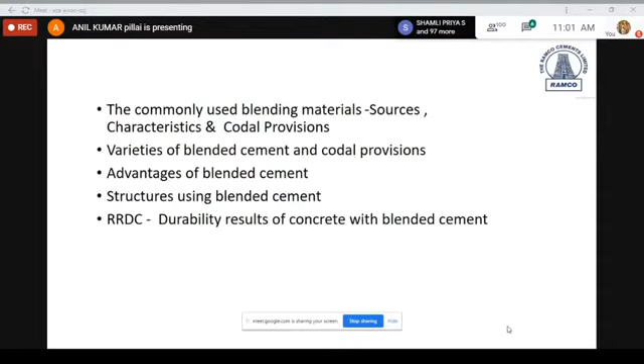I would be sharing those results so that you would be convinced as to what is the technical and qualitative reasons for using either blended cement or blending materials in concrete.

And blended cements from the Ramco Cements Limited. In fact, we not only manufacture one type of blended cement, there are varieties of blended cements that we manufacture. So a brief overview of that and how the type of cement must be selected. This is very critical because as civil engineers, you would be confronted with various types of cement, various brands of cement, and what are the considerations you must give before selecting the type of cement. That is very important. It is not just that you go in for selecting PPC, PSC, or ordinary Portland cement.

So these are some of the points that I would be covering in today's presentation. I hope this would be of interest to all of you because as civil engineers, you must know the properties of materials that is going to go in for concrete.

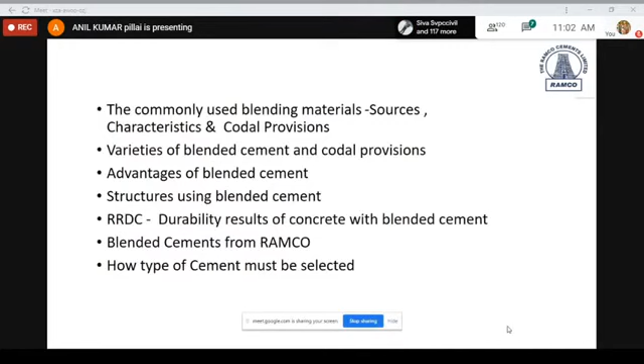The first and foremost thing, let me go to the history of Roman seawater concrete itself, which would throw more light on why it is relevant. If you look at this, the chemical secrets of concrete Roman seawater that has spent the last 2000 years submerged in the Mediterranean Sea have been uncovered by an international team of researchers led by Paulo Monteiro of the US Department of Energy. What they have found is that the Romans made concrete by mixing lime and volcanic rock.

The lime and the volcanic ash were mixed to form mortar, and this mortar and volcanic tuff were packed in wooden forms. The seawater instantly triggered a hot chemical reaction. The lime was hydrated, incorporating water molecules into its structure, and reacted with the ash to form a whole cement matrix. This is how the research led into the history of how volcanic ash enabled them to make a mortar or concrete which has seen the ravages of time.

So what I just wanted to tell you through this slide is that blended cements are not a novelty. It has been there for ages, right from the time when the Romans invented concrete. So this is nothing new, but many of us do not understand its significance, why it is being used. We only think that it is used from an environmental perspective.

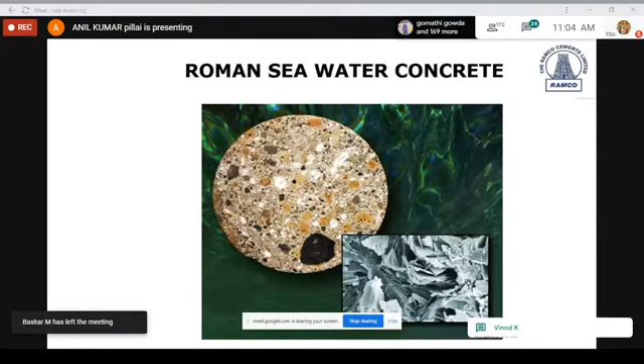Cements containing silica fume are relatively new. Otherwise, pozzolanic cements have a very rich history and are nothing new.

Some of the commonly used blending materials are fly ash, slag, and Portland cement. We proportion fly ash or slag with Portland cement in various proportions to get the desirable concrete. Silica fume, or amorphous silica, is also a blending material, but you don't mix silica fume at site. Silica fume in the non-crystalline or amorphous form is used to blend with Portland cement. So these are some of the materials available. The commonly used blending materials are fly ash, slag, and silica fume.

There are many other blending materials prescribed in the code, but these three are the commonly used ones, either blended with cement at site or used as blended cement. Fly ash has very spherical particles compared to Portland cement and slag, due to which you get good workability. So these are the commonly used blending materials, which you need to keep in mind.

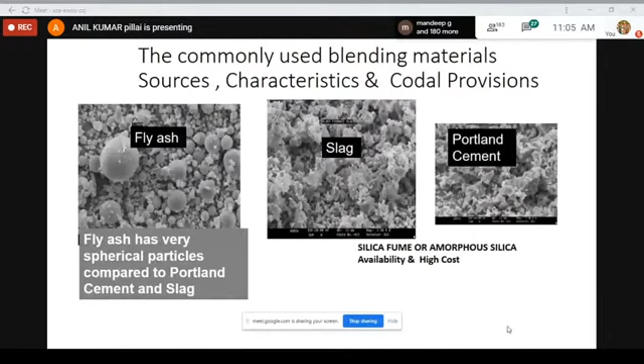Some characteristics of blending materials: these pozzolans are rich in silica and alumina, and they combine with lime. As shown in the first slide, lime was combining with pozzolana to form a cementitious compound. These compounds are very similar to those produced by the Portland cement hydration reaction, and that reaction produces lime, hence Portland cement works well with pozzolans.

The degree of reactivity of various pozzolans with lime is called pozzolanicity. This is very interesting. The definition of pozzolan is a siliceous and aluminous material. By itself, it is inert, but when it combines with lime, it forms a cementitious compound - that is why it is called pozzolana. The degree of pozzolanicity depends on how much calcium hydroxide is consumed. If more calcium hydroxide is consumed, that means the degree of pozzolanicity is very high. So that is what the definition of pozzolanicity is all about.

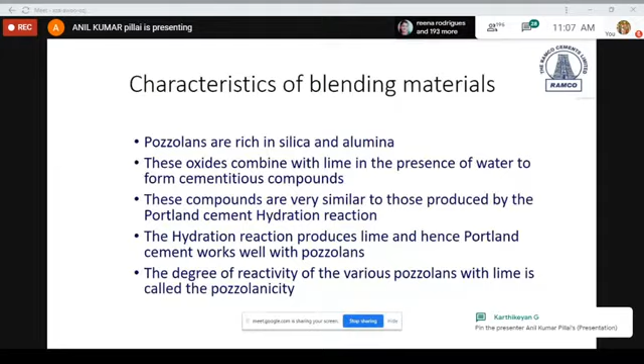This is some basic definition you must know. Some use these terms interchangeably - some call it blending material, some call it supplementary cementitious material. Technically and environmentally it is advantageous, and it can be used in combination with Portland cement. It's available for use in normal concrete, special concrete, and has an excellent and proven performance record.

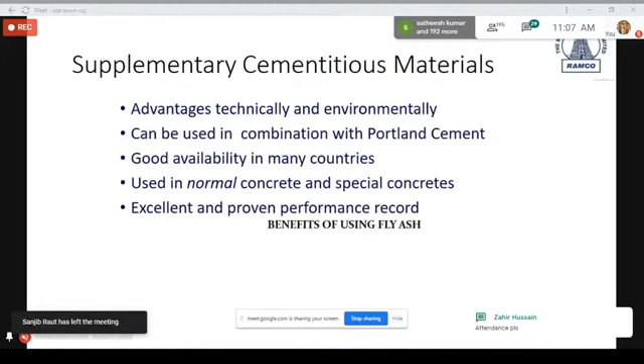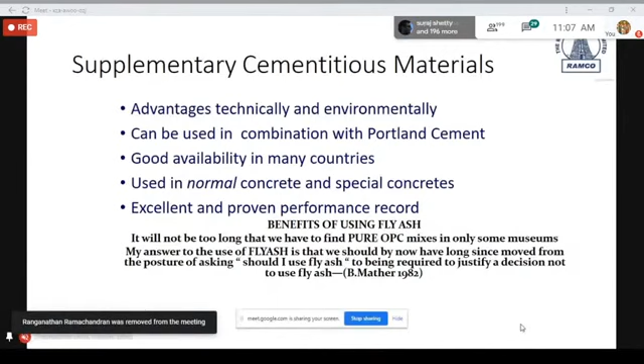A quotation I would like to share is that pure OPC can only be kept in a museum nowadays, because in almost all concrete being used today, either blended cements or blending materials are used. So there is no question of asking whether you must use it or not - it is an inseparable part of concrete today. Without blending materials, or supplementary cementitious material as it is called, you cannot make a durable concrete. This is accepted and tested; through durability testing also you come to know that without this you cannot make concrete with high performance, what we call high performance concrete.

This slide is as per IS 456, the code for plain and reinforced concrete, which all of us would know. IS 456 recommends usage of mineral admixtures, as does the National Building Code of India 2016. They recommend pozzolanic materials such as fly ash, silica fume, rice husk, and metakaolin.

Silica fume is very difficult to get, because it is obtained from the silicon and ferrosilicon industry, where silica vapors are condensed and then sold as silica fume. There are a lot of challenges in storing silica fume. Especially in high grade concrete, it is used in proportions ranging from 5 to 10%.

Availability of rice husk ash as such is available, but not in huge quantities. So there is some problem as far as the availability and sourcing is concerned.

Metakaolin is also recommended. These are some of the pozzolanic materials, apart from ground granulated blast furnace slag. Please understand that if slag is not granulated, you will not have the glass content in it, and without the glass content, there is no point in using the slag. It has to be quenched in cold water so that the minimum glass content, as recommended in the code, is 85%, so that it can give you the desirable properties.

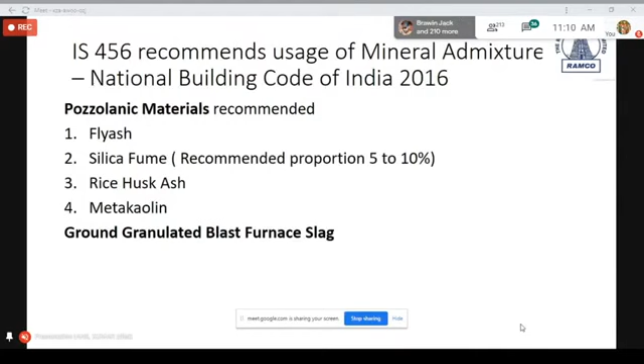The usage of mineral admixtures, fly ash and slag, is considered a mineral admixture, unlike chemical admixtures which are also used. Fly ash and slag have separate codes, and some characteristics of these materials are mentioned in the code. So you can see how these blending materials are regulated as per the codal provisions.

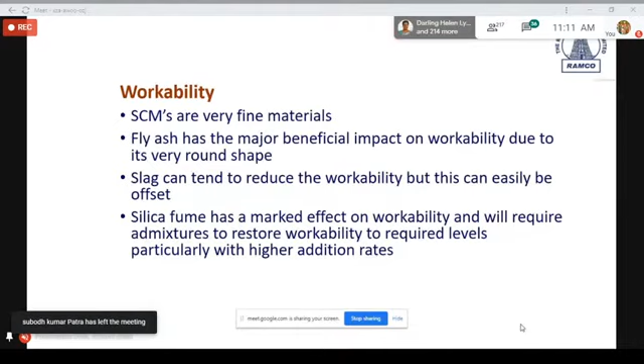From the perspective of usage in concrete, you get very good workability because these are very fine materials, having a favorable impact on workability due to their spherical or round shape. Slag sometimes tends to reduce workability, but this can easily be offset. Silica fume has a marked effect on workability and will require admixtures to restore workability to required levels, particularly with high addition rates.

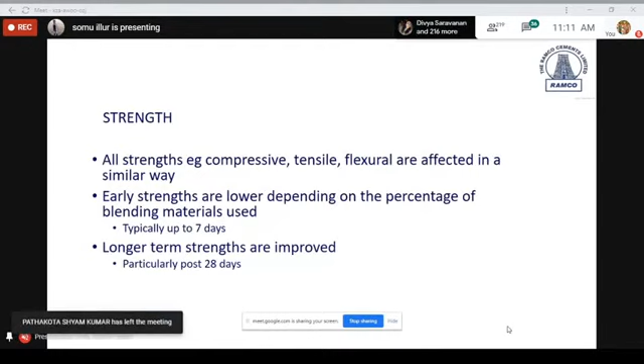You will have to look at the strength part, because depending on the percentage of blending material used in concrete, the strengths are affected. One needs to be careful about the percentage of blending material, because there are two ways of adding it: one at site, and the other is getting blended cement directly from the cement plant. When using blending material at site, if you use more than what is prescribed, the compressive strength, tensile strength and flexure can be affected, so one needs to exercise caution.

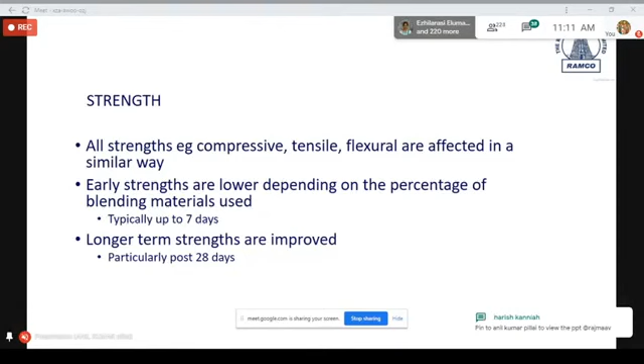That is why it's always better to get blended cement from a factory, so that you don't run into the problems normally associated with not having the required facilities at site.

Now we have looked at the blending materials, let us come to blended cement. As I was saying, in the blending material, fly ash and slag have some desirable properties. For example, in fly ash you need to look at the lime reactivity, and the minimum lime reactivity specified in the code is 4.5 Newton per mm square.

What is this lime reactivity? It is the capability of lime to react with the pozzolanic material, evaluated by this lime reactivity value. So lime reactivity of fly ash has to be a minimum of 4.5 MPa, then only it can be used. Similar is the case with slag, as I was telling, the minimum glass content has to be 85 to 90%, otherwise it will not give the desirable properties. These are the varieties of blended cement.

Portland pozzolana cement, IS 1489 is the code, and there are two parts to it, part 1 and part 2. Part 1 is fly ash based, and part 2 is calcined clay based. So Portland pozzolana cement IS 1489 has two parts.

Calcined clay based is not normally used. It is the fly ash based Portland pozzolana cement that is used, and that is what is available in the market nowadays. If you go to a typical cement shop or cement dealer, you will find that the type of cement sold in huge quantity is the Portland pozzolana cement, fly ash based.

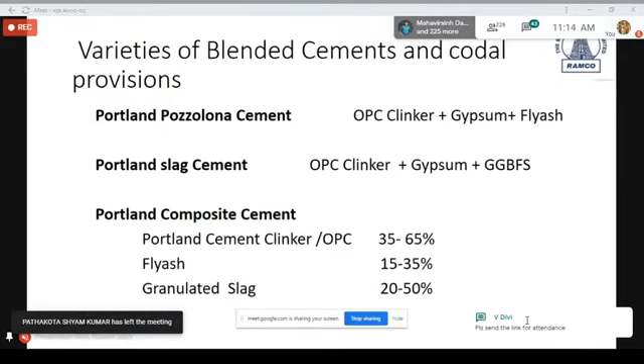Portland pozzolana cement and Portland slag cement are recommended for usage in RCC works as per IS 456. Portland composite cement, as of now, is not mentioned in IS 456 for usage in RCC work—there are some more studies on carbonation to be done for Portland composite cement. Whereas Portland pozzolana cement and Portland slag cement are being used in all RCC works wherever you need durability, which is a very important parameter.

This is an overview of the varieties of blended cement. Some of the advantages of blended cement I'd like to share are high compressive strength—if you add the required percentage of blending material, you will get the required compressive strength. One significant advantage is the ultimate strength: the strength beyond 28 days is much higher in blended cement compared to ordinary Portland cement. So if you need ultimate strength, you need to go in for blended cement.

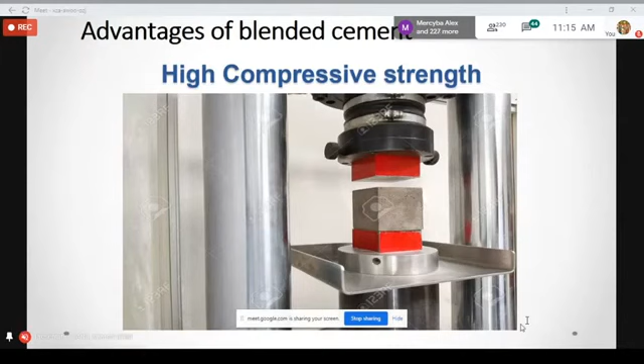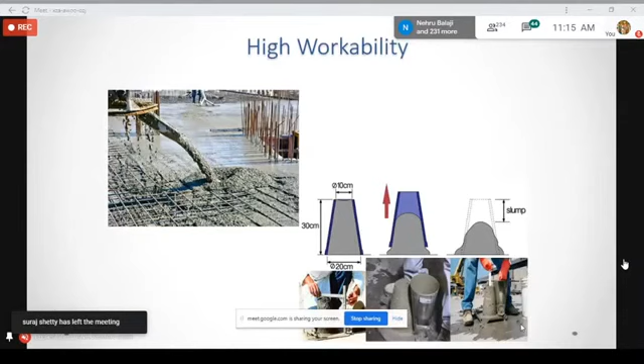The second and most important thing you get in concrete—since ultimately you're going to use this blended cement in concrete—is workability. The workability of concrete, as you all know, is measured using the slump cone test. When you measure it this way, you can evaluate that the workability of concrete using blended cement is much higher. That's why blended cement is recommended even for all underground works. For example, in the case of bored cast-in-situ piles, you need concrete with high workability, and you get that using blended cement. So this is the second advantage you get.

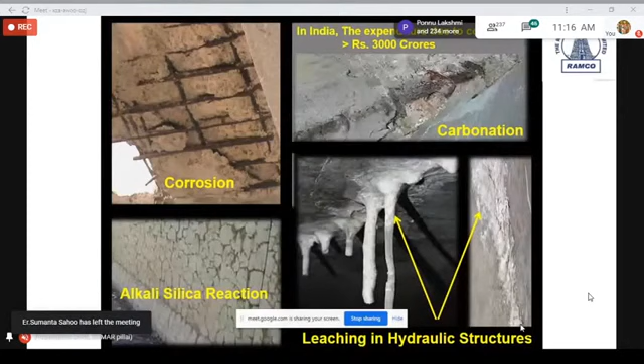The third and most important thing we're concerned about nowadays is durability. The durability of concrete can be affected in numerous ways. One of the most common attacks on concrete is corrosion—the attack of chlorides on concrete, which can be quite devastating. It's a process that can sometimes be very slow, but corrosion has its own problems as far as concrete is concerned.

The second attack on concrete is carbonation, the attack of carbon dioxide on concrete structures. If you go into a highly polluted area, carbonation can be quite devastating and can attack concrete. Alkali-silica reaction is seen in places where aggregates have some kind of silica in them, and that can cause a durability problem.

Leaching in hydraulic structures, or even in normal structures, shows up as free lime coming out as white deposits—what we call leaching or efflorescence. These are some commonly seen durability problems. You could also see what's called sulfate attack, which is also mentioned in IS 456, and sulfate attack can be quite devastating. So these are some of the durability problems.

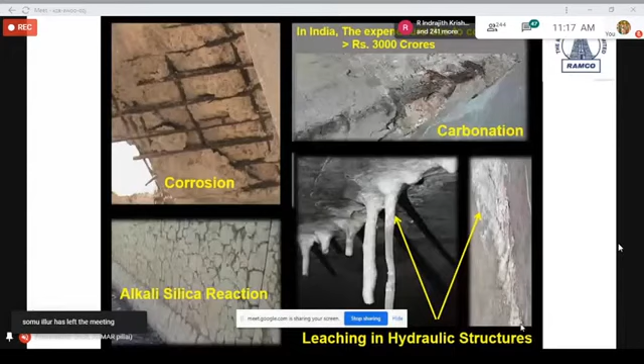Now, this is something you should be aware of, though you need not go into detailed chemical study. Just to suffice, you must understand delayed ettringite formation, which is nothing but a type of sulfate attack. In simple language, it's a sulfate attack wherein ettringite forms when tricalcium aluminate reacts with calcium sulfate, that is gypsum. If ettringite forms in the early stages, it's not a problem. The ettringite that forms after some period, after the concrete has hardened, is a problem—and that's why delayed ettringite formation is considered a durability problem.

And thaumasite, which is being mentioned here, is also a special type of sulfate attack.

It is named thaumasite because it is similar in structure to a mineral which is found, and it is a kind of sulfate attack, a specific type of sulfate attack. So both delayed ettringite formation and thaumasite are not recommended, and they can be detected using, for example, X-ray diffractometer or petrographic studies. You can find the presence of delayed ettringite formation or thaumasite, which can create problems as far as durability of concrete is concerned.

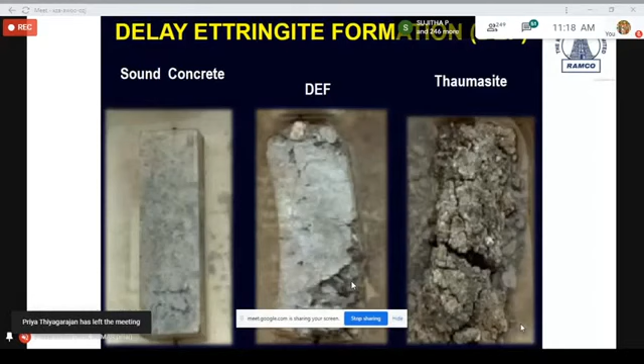You might wonder where I got these 3 points: limitation of water soluble sulfate content, alkali aggregate reaction, and soluble chloride content. This is from our own codal provisions, Indian standard codal provisions, which has given a lot of stress on durability of concrete. Water soluble sulfate content, expressed as SO3, because SO4 is nothing but gypsum, should not exceed 4% by mass of cement in the mix. So the water soluble sulfate content is something which is limited.

Alkali aggregate reaction, again in the form of sodium oxide or potassium oxide, can either originate from cement or other sources, and it can produce expansive reaction. That is why the code recommends that usage of fly ash or slag conforming to accepted standards, as part replacement of OPC, can help solve the problem of alkali aggregate reaction.

Chloride content is normally found in places near coastal areas, and one needs to be very careful as far as chloride attack is concerned, because chloride can attack the steel in RCC structures. That's why you will find that the soluble chloride content limit is 0.6 per kg per cubic meter of concrete, and water soluble sulfate content should not exceed 4% by mass of cement as far as the concrete is concerned.

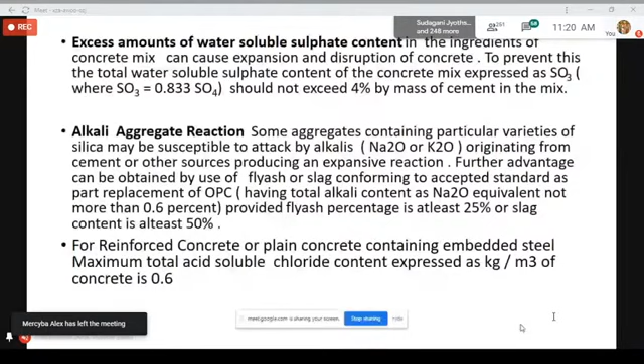Now I would just like you to pause and reflect at this point of time. We have covered different types of cementitious material, the role of fly ash and slag, where fly ash is used from the lime reactivity perspective - the ability of fly ash to react with free lime is very important. The commonly manufactured blended cements in India are Portland Pozzolana cement (fly ash based), Portland slag cement, and nowadays composite cement also coming into the market. The reason for using blended cement, if I can summarize in one sentence, is durability perspective as compared to ordinary Portland cement, because ordinary Portland cement has a high heat of hydration, whereas blended cement has low heat of hydration.

Now let's look at some durability measuring tests. You would all be familiar with how workability in concrete is measured using the slump cone test, and compressive strength is measured using the compressive testing machine. But how do we check durability in concrete? Various aspects of durability we will cover now, and how to select the right type of cement, the right product for the right application.

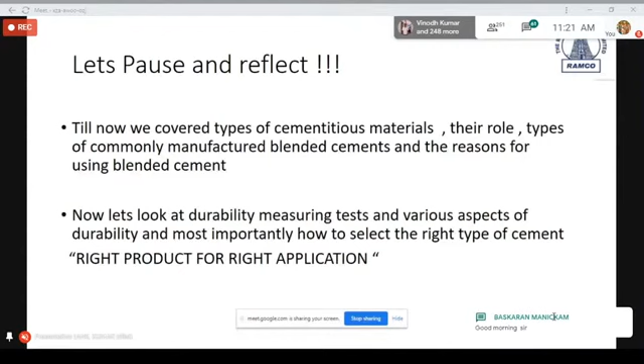A very commonly used test for durability is called the rapid chloride penetration test, where the specimen is in the form of a circular specimen, placed here. Then through the passage of charge, measured in coulombs, you can find out how durable the concrete is. That is the basic philosophy behind the rapid chloride penetration test. It is an ASTM standard, American Society of Testing Materials, as per that code. This rapid chloride penetration test is done on concrete, not on cement - you need to be very careful on that.

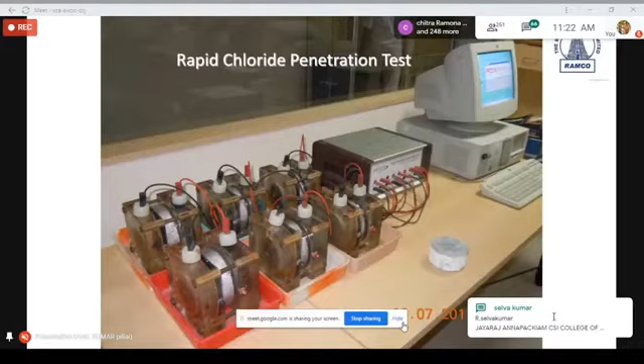This shows the different amount of charge that is passed. If it is greater than 4,000 coulombs, the concrete durability is low, whereas if it is below 2,000 coulombs, it can be acceptable. Anything between 1,000 to 2,000 or lesser is very good concrete with high durability. As you can see, when the charge passed is more, the penetrability is higher, meaning the durability of concrete is low.

As the charge passed is lesser, you will find that the durability of concrete is high. That is the basic philosophy behind that. Ramco RSG, when used in concrete, gave durability to the tune of 1,218 coulombs, which is considered a very good durable concrete. So that is the significance of Ramco Super Grade.

It is a Portland Pozzolana fly ash based cement, which enhances durability in concrete. That is how durability can be measured using the rapid chloride penetration test. Now there are different methods of checking the durability of concrete.

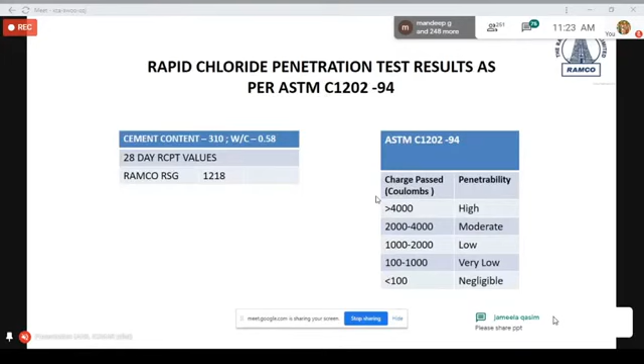Another test is the electrical resistivity of concrete, based on resistivity in kilo ohms centimeter. If the resistivity is lower, that means the probability of corrosion is very high. So the resistivity value should be much higher so that your corrosion probability is lower.

So how come this resistivity is much higher? We will see the mechanism behind that. Why is it that when you use PPC cement, the electrical resistivity of concrete is much higher, is something that needs to be looked into.

Another method of testing the durability of concrete is the water permeability test. So the first two tests you saw are the RCPT test and the electrical resistivity of concrete test, which measures corrosion probability.

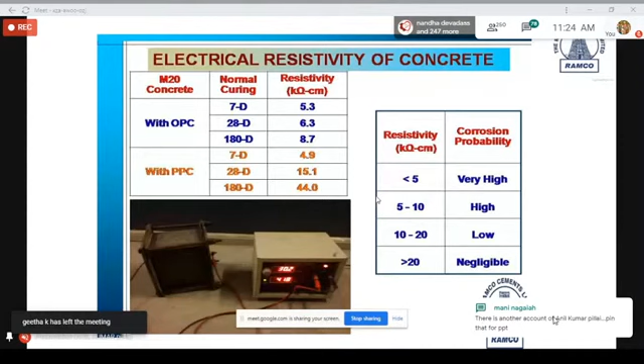The third type of test is the water permeability test, which is used in some critical concrete structures, such as nuclear power projects, to evaluate the durability of concrete. Instead of charge, water is passed through the concrete specimen, and based on the depth of water penetration, you can measure the water permeability.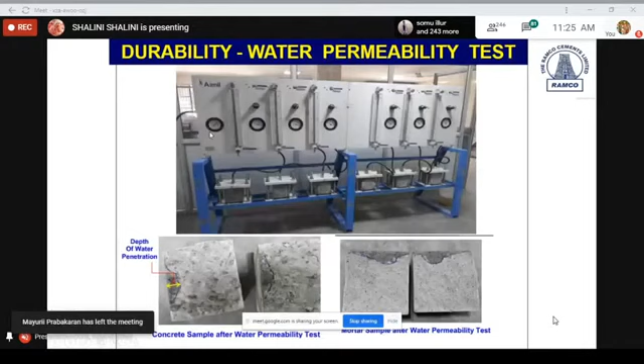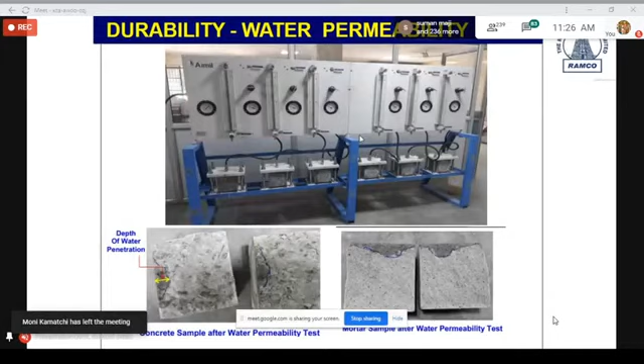If the depth of water penetration is lesser, the concrete is much more durable. If the depth of water penetration is more, the concrete is not durable. So the water permeability in mm, as per IS 516, after 28 days shows a difference you can see, 95 mm or 57 mm. This is for M20 grade concrete where M sand has been used. So this is how water permeability results are obtained.

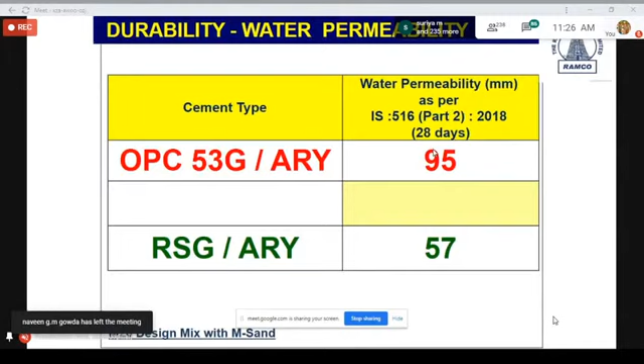RCPT for different water cement ratios. Again, this result is from our Ramco Research Development Center. We have a research center at Chennai where we do a number of durability tests. You will find that at various water cement ratios, this is the ordinary Portland cement, and this is the Portland Pozzolana cement. At various water cement ratios, you can see what the RCPT values are.

In the case of ordinary Portland cement, you see 2750 coulombs, 1650 coulombs. So you can see how with various water cement ratios, the RCPT value changes. It is very important to maintain the water cement ratio for a better, lower RCPT value. That is what we are looking at.

Similar is the case for the water permeability test. If you see, the permeability of water at a lower water cement ratio with blended cement is much better compared to concrete with ordinary Portland cement at the same water cement ratio. You can have a comparison of that. The cement content taken is 350 kg per cubic meter.

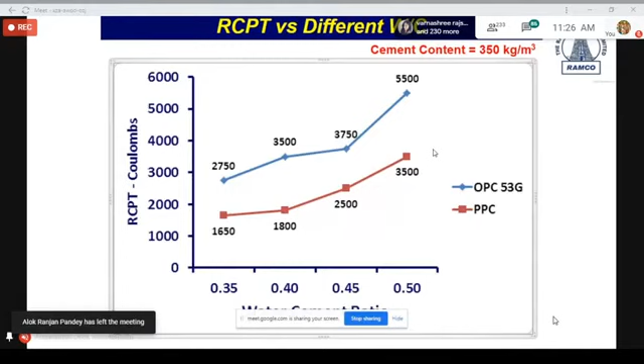So this is also a durability test on concrete: heat of hydration. What is heat of hydration? When cement reacts with water, there is an exothermic reaction and heat is generated. This generated heat causes thermal stresses which can affect the durability of concrete. So heat of hydration, although not mentioned in the cement test certificate, is a very critical parameter. That is the advantage you get with blended cement, especially Portland Pozzolana cement, where heat of hydration in kilocalorie per kg is lesser than ordinary Portland cement.

The reason is, in ordinary Portland cement, you don't have any blending material, whereas in PPC you have the fly ash, which takes care of the heat of hydration and decreases it to a manageable limit. You cannot entirely neglect or reduce the heat of hydration to zero, but you can definitely decrease it.

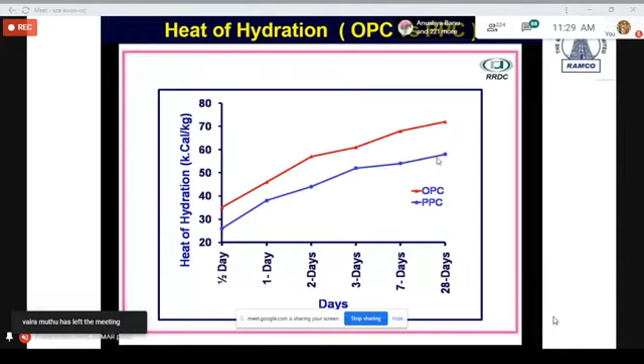So that is what it shows. Temperature scanners are available which help you check the temperature of concrete. This is something very interesting - maximum temperature evolution taking place in case of OPC 53 grade and Ramco Super grade, which is a PPC cement. You will find that the maximum temperature evolution is much lesser. So these are some of the tests that can be done to find out how much temperature is there in case of blended cement or ordinary cement.

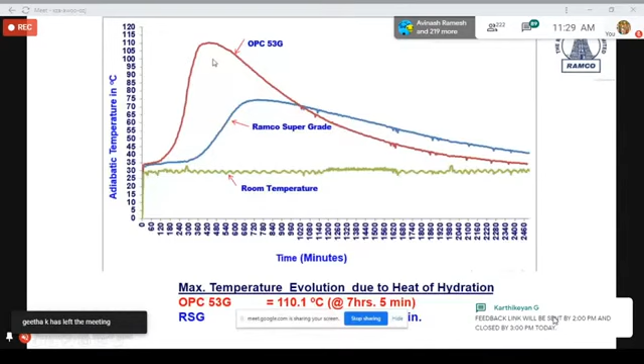Now, all of you would have seen that in case of blended cement, the durability is higher as compared to ordinary Portland cement. What is the reason for that is something you must reflect on.

The property behind that is shown in this equation, where when ordinary Portland cement reacts with water, you get CSH gel and calcium hydroxide. As you can see, the CSH gel is something which is desirable. This calcium hydroxide or free lime is undesirable in concrete because it can lead to various problems like leaching, efflorescence. So in case of blended cement, this calcium hydroxide reacts with the fly ash, forming a secondary gel formation, CSH gel, which enhances the durability of concrete.

So what happens is, the quantity of CSH gel is more in case of blended cement as compared to ordinary Portland cement. Now what is the result of that? Why is it so interesting is, you have seen the various kinds of attack that concrete faces.

The carbonation, the chloride attack, the sulfate attack - by virtue of the impermeability of concrete, by virtue of the formation of CSH gel in huge quantities, it will block or become much more impermeable by virtue of its imperviousness. Various concrete attacks are stopped because of the CSH gel. So that is why the secondary gel formation in case of Portland Pozzolana cement, fly ash based concrete or fly ash based cement, is very interesting - your CSH gel and your impermeability is enhanced.

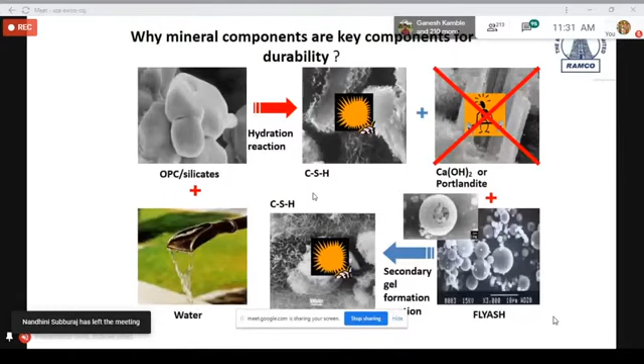We are not alone in talking about durability of concrete. It is the National Building Code of India 2016 which also talks about the durability of concrete, because if you look at it from a sustainability perspective, durability is a very important parameter. And various factors influence the durability of concrete.

Most important is the permeability. If the permeability is higher, the ingress of water, oxygen, carbon dioxide, chloride, sulfate, or other potentially deleterious substances can affect the durability.

Factors affecting durability include the environment. You would have seen in IS 456 different environments mentioned there - mild, moderate, severe, very severe, and extreme conditions of the concrete. So depending on the environment where the concrete is being used, the durability is affected.

The cover to the embedded steel is very important, because until the cover is of good quality, your durability will be affected. The type and quality of constituent material is again very important, because if you add blending material, if you add blended cement, it is considered good as compared to going in for just ordinary Portland cement 53 grade. Cement content plays a role.

More cement content, more shrinkage cracks. That is why IS 456 limits the quantity of cement content to 450 kg per cubic meter. If you want to go beyond 450 kg per cubic meter, what will you do? You will have to add cementitious material like fly ash or slag.

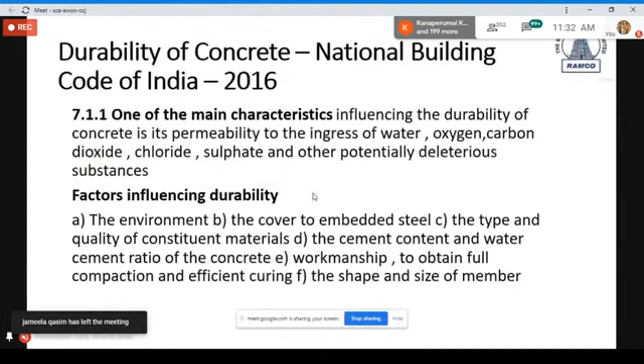Again, this we have already looked into. You can look this in IS 456 2000, where if you have sulfates in soil, what happens - we have seen during our interaction with construction professionals that when there is sulfates, immediately they will jump to the conclusion that SRC cement has to be used, without looking into the fact that SRC cement or sulfate resistant cement is poor in resisting chloride. SRC cement is only effective in resisting the attack of sulfates alone. But there is a solution for that.

As mentioned in IS 456, when total SO3 present in soil is between 0.5 to 1%, or if the SO3 in 2:1 water soil extract is 1.9 to 3.1 gram per liter, or SO3 in groundwater is 1.2 to 2.5 gram per liter, the type of cement recommended is super sulfated cement, sulfate resisting cement, Portland pozzolana cement, or Portland slag cement. The problem with sulfate resisting cement is if there is chloride, it is not recommended because sulfate resisting cement cannot resist the attack of chloride. That has to be borne in mind.

The minimum cement content in case of PPC or PSC, you will have to use 350 kg per cubic meter, and maximum free water cement ratio is 0.45 if it has to resist the attack of sulfates. This is very important to bear in mind - if you have this much percentage of sulfate expressed as SO3 in soil or groundwater, you can safely go for blended cements and not jump to the conclusion that you have to use SRC cement. This is clearly mentioned in IS 456 2000 in a tabular column as to what you should do, and that is where you can use blended cement for resisting the attack of sulfate as well as chloride.

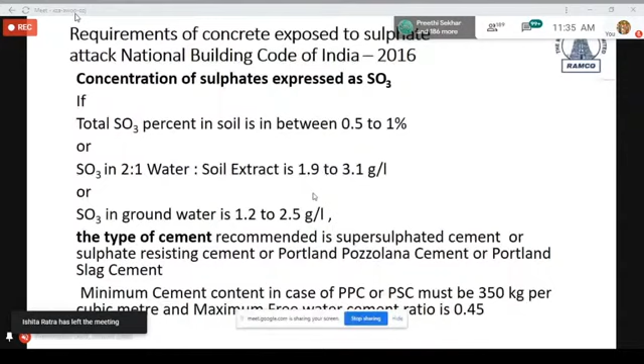You would have seen PPC cement being used, or in certain places RMC units would be having OPC 53 or blending material mixed at site. So concrete practically goes into all types of structures - there is nothing called this particular structure uses blended cement. Almost all structures you see now in our country are using blended cement or blending materials. Very rarely will you find where only ordinary Portland cement is used. That is because even for underground concrete structures, for higher grade of concrete, without the usage of blending material, you cannot use it from the durability perspective. So practically every structure uses that.

There are some prestigious structures you look at - for example, the tallest structure, Burj Dubai, they have used blending material because then only you will be able to pump the concrete to greater heights, because blending material or blended cement is supposed to give you good workability.

Now, as far as Ramco cement is concerned, we manufacture 12 varieties of cement. Why 12 varieties of cement? There is a reason for that.

You will find that ordinary Portland cement as per IS 269, as all of you would be aware, 43, 53, 33 grade, are all combined into one code now as per the latest amendment - it is IS 269. Under ordinary Portland cement IS 269, Ramco cement is manufacturing 43, 53, 43 infra, 53 infra. The reason is infra cement is specifically recommended for concrete with a larger slump retention time. For example, we supply cement to various projects, to RMC units who require larger slump retention time - there we recommend infra 43 grade, infra 53 grade, because there they are adding the blending material at site itself.

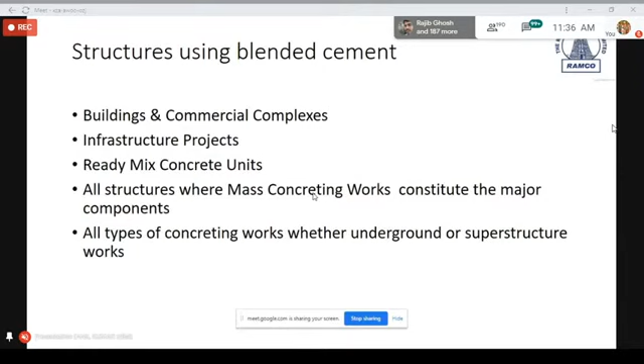Then we have our Ramco Super Fast cement, which is being used for precast units. Almost all the precast units in Tamil Nadu, Kerala, Karnataka are using Ramco Super Fast cement. The advantage one gets out of it is the quick removal of formwork or mold. Portland Pozzolana cement as per IS 1489 Part 1, fly ash based - Ramco Super Grade, Ramco Super Crete, Ramco Super Fine, Karthic Super Plus. Now, why is Ramco Supercrete there?

There was a demand from customers that blended cement, PPC cement, must also have high compressive strength, and at the same time low heat of hydration. That is where Ramco Supercrete cement is a premium PPC cement, where you get higher compressive strength as well as low heat of hydration.

Then we have the Portland slag cement, Ramco Super Steel, Ramco Samudra. Now why have we manufactured these 12 varieties of cement? There is a particular reason - we also have the sulfate resisting Portland cement, Ramco Super Coast, as per IS 12330. So these are the 12 varieties of cement. Why are we manufacturing this cement?

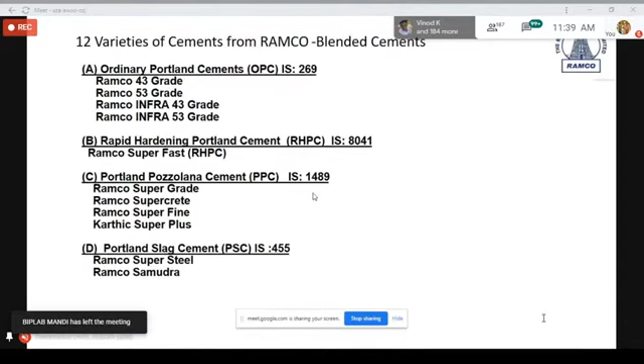This is how it looks like - the various types of cement: the ordinary Portland cement, the rapid hardening Portland cement, the PPC with 4 types that we have, 2 types of PSC, and the sulfate resisting Portland cement.

Now why we have gone for Ramco Supercrete cement is customers wanted high workability as well as high early strength, high ultimate strength, and low heat of hydration. So you can just look at this type of cement.

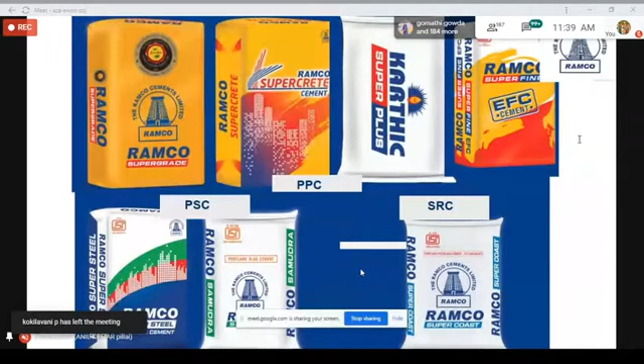You need to have the best of ordinary Portland cement as well as the best of PPC combined together in one cement, and that is where Ramco Supercrete cement scores over all other types and brands of cement available in the market, because you are able to get durability and early strength.

So there was concern about the usage of blended cement - when blended cement was introduced, the rate of gain of strength was not at par with ordinary Portland cement. Whereas in case of Ramco Supercrete cement, you get a higher rate of gain of strength as well as low heat of hydration. That is the advantage.

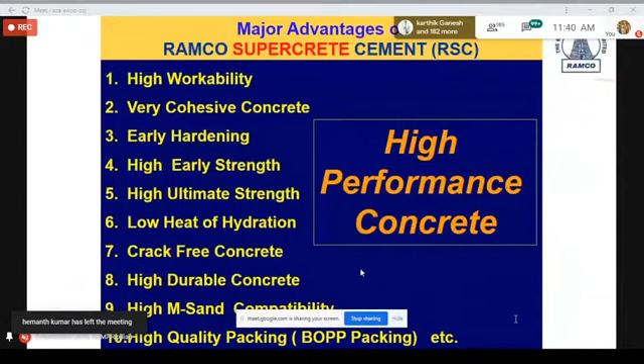Now, just for the knowledge of budding civil engineers, before you select a type of cement, you need to understand the type of project you are going to use the concrete for. That is very important, because it is not the concrete mix design per se that is important - where is it going to be used?

Is it a private or a government project? Is it a specialized project where you need precast, pre-stressed concrete, mass concrete, nuclear power structures, dams? Because for all this, you will find that the requirement of concrete changes.

For example, in a dam, you need concrete that has low heat of hydration, whereas for precast work, you need high one-day strength. For pre-stressed concrete, you need to stress those cables, for which you need high early strength. So before you specify the type of cement, you understand the type of project.

For a normal residential building, you look at workability measured in terms of slump to be 60 to 80 mm, and compressive strength at 3 days, 7 days, 28 days, along with exposure conditions. So you need to look at these particular parameters of concrete and then decide which type of cement has to be used.

Always one should be very clear about the concrete requirement - what is it that I want as far as performance-based criteria is concerned in concrete? Then only you should go ahead.

Whereas for major projects, there would be some specific requirement. Some projects may need slump after only 30 minutes, some may need 60 minutes. In case of RMC units, the concrete has to be transported - sometimes 2 hours, sometimes 3 hours, sometimes 4 hours.

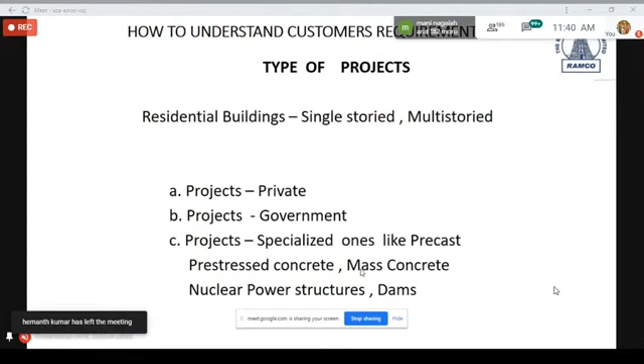Some projects need compressive strength after 1 day - for example, in structures using the slip form technique to construct chimneys and silos, they may need compressive strength after 1 day. So you need to define that compressive strength.

Most importantly, and the most challenging aspect of all this, is the usage of chemical admixtures. Please understand - before using chemical admixtures, conduct as many trials as possible with chemical admixtures and with concrete without chemical admixtures.

What we are saying is that you make a controlled concrete and a concrete with chemical admixtures, compare both of them and see whether you are able to get the desired properties in concrete or not. The last requirement is whether the concrete is a special concrete. You may be using self-compacting concrete, which means a concrete that does not need any kind of vibration. The cement may be used for AC sheet manufacturing, high 1-day strength in case of precast works, and of course you need to look at the exposure conditions.

So as a civil engineer, please look at concrete from a very scientific point of view. That is why our team of civil engineers, when they visit site, collect the details of concrete in terms of a questionnaire wherein the grade of concrete, the slump of concrete, and the type of chemical admixture to be used are mentioned. All these parameters have to be in the questionnaire so that you would be able to recommend the right type of cement.

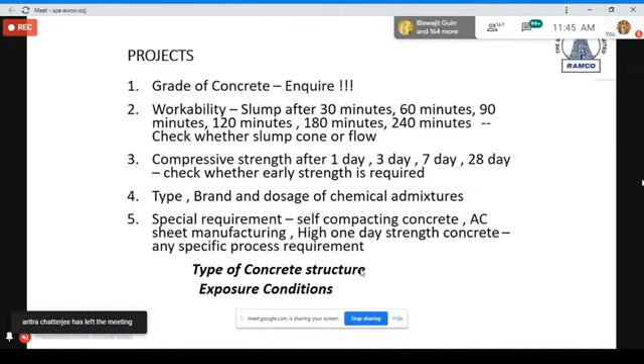One reason we recommend usage of blended cement is the durability criteria. We all are talking about sustainability. Sustainability is nothing but fulfilling the requirements of concrete for the present time without sacrificing the interest of the future generation that is yet to come. So from an environmental perspective, from a quality perspective, that is from the technical perspective, blended cements or Portland Pozzolana cement, fly ash based cement is the right choice.

And if you want a PPC cement with high compressive strength, you can go in for Ramco Supercrete cement, which has compressive strength equivalent to ordinary Portland cement. So you will find we have different types of PPC cement in various markets which fulfill the criteria. But before you use any type of cement, define the concrete that you are going to use it for. With that thought process, I conclude my presentation here as far as the usage of blending material or blended cement is concerned.